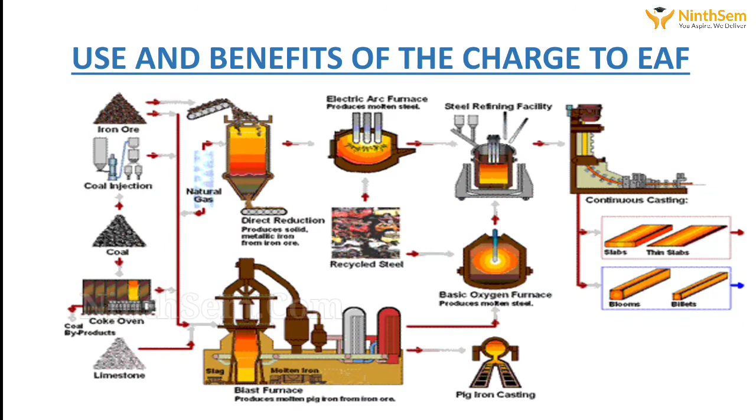In this session, I will share about the use and benefits of charge to the electric arc furnace. First, I will discuss about basic pig iron used in the electric arc furnace.

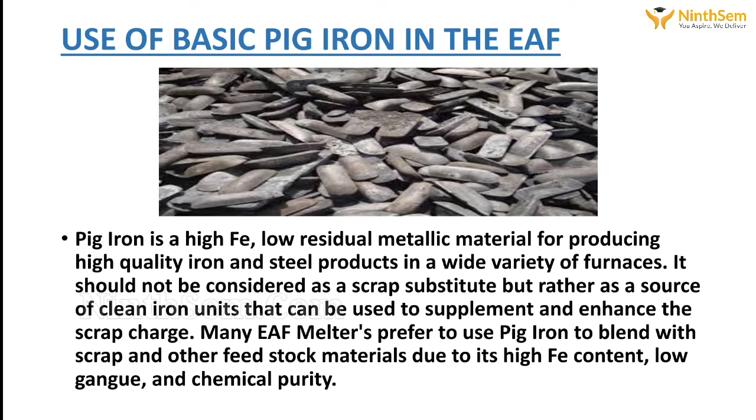Pig iron is a high Fe, low residual metallic material for producing high quality iron and steel products in a wide variety of furnaces. It should not be considered as a scrap substitute, but rather as a source of clean iron units that can be used to supplement and enhance the scrap charge. Many EAF melters prefer to use pig iron to blend with scrap and other feedstock materials due to its high iron content, low gangue, and chemical purity.

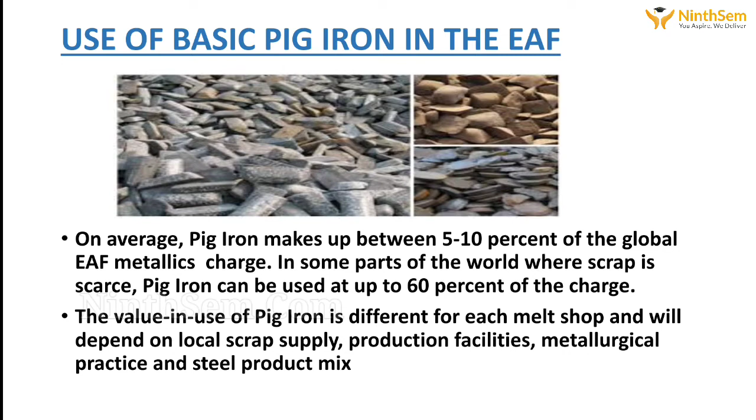On average, pig iron makes up between 5 to 10% of the global EAF metallic charge. In some parts of the world where scrap is scarce, pig iron can be used at up to 60% of the charge, depending upon grade chemistry. The value in use of pig iron is different for each melt shop and will depend on local scrap supply, production facilities, metallurgical practice, and steel product mix.

So what are the benefits of using basic pig iron in electric arc furnace? High purity, low gangue allows for the production of steel products requiring a low residual content or for the use of higher percentage of lower cost scrap in the charge mix. Its chemistry is known and consistent and certified by the analysis that is being done by the quality control department.

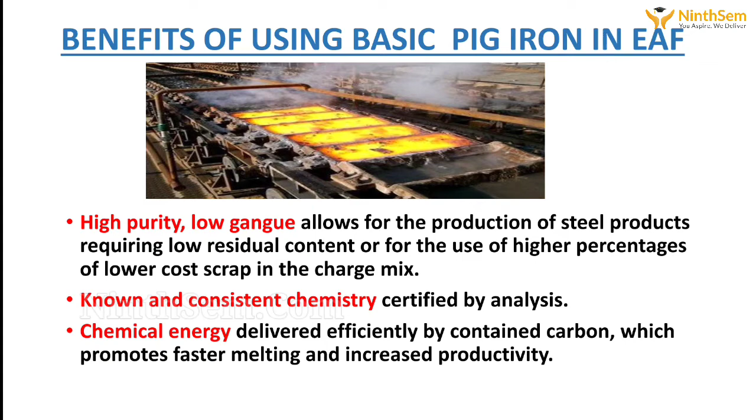Chemical energy is delivered efficiently by carbon content, which promotes faster melting and increased productivity. Its high density can reduce the number of bucket charges, allows for increased use of lower cost, less dense materials, and reduces storage space requirements.

It also has consistent shape and form, providing efficient material handling characteristics. And it is easy to store with no special requirements, silos, cover space, etc., with a very low rate of degradation even when stored outdoors and uncovered.

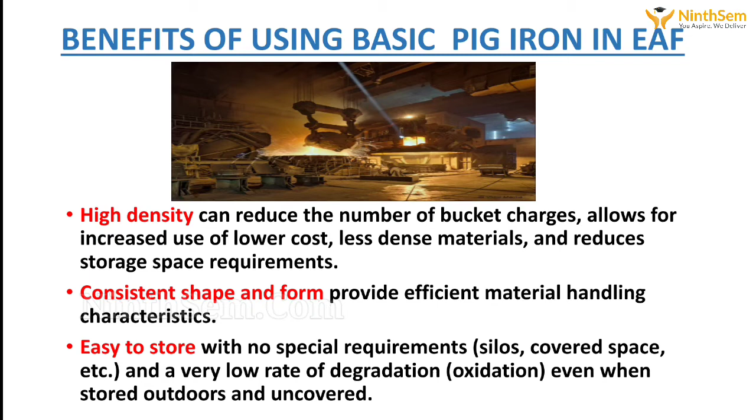Then, use of ferro shots in the electric arc furnace. Steel production in the electric arc furnace continues to grow worldwide. EAF melters prefer to use ferro shots to blend with scrap and other metallics due to its high iron and energy, carbon and silicon content, low gangue and chemical purity.

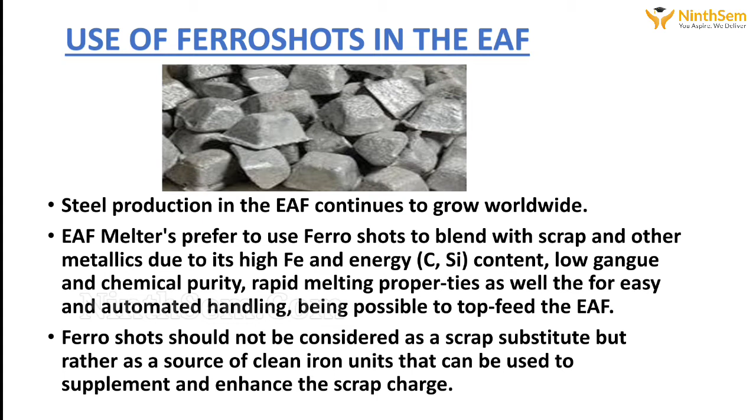It also has rapid melting properties, as well as easy and automated handling, being possible to top feed the electric arc furnace. Ferro shots should not be considered as a scrap substitute but rather as a source of clean iron units that can be used to supplement and enhance the scrap charge.

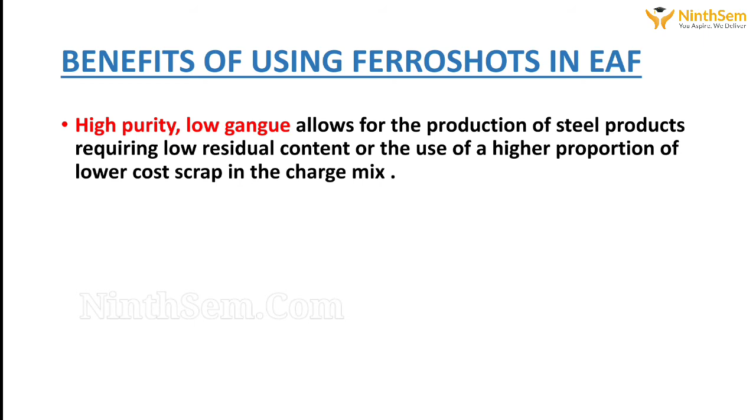Let's discuss the benefits of using ferro shots in EAF. It has high purity, low gangue, consistent chemistry, and chemical energy delivered rapidly by continuously feeding to the furnace, easy to handle manually and ideally in automatic operation.

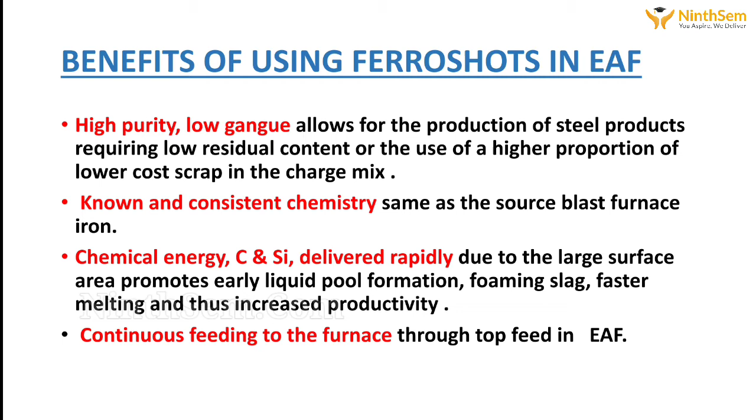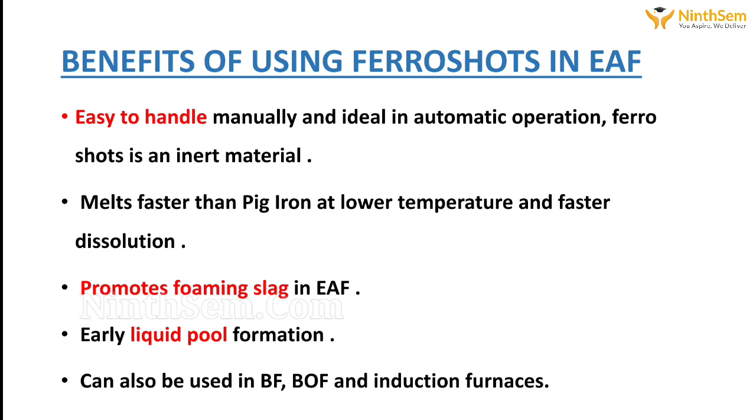It melts faster than pig iron at lower temperature with faster dissolution, promotes foaming slag in EAF, and early liquid pool formation. It can also be used in blast furnace, basic oxygen furnace and induction furnaces. Then, direct reduced iron.

The past 5 years have seen increasing supply and use of pig iron, direct reduced iron, and hot briquetted iron in the electric arc furnace. DRI should not be considered as a scrap substitute but rather as a source of clean iron units that can be used to supplement and enhance the scrap charge.

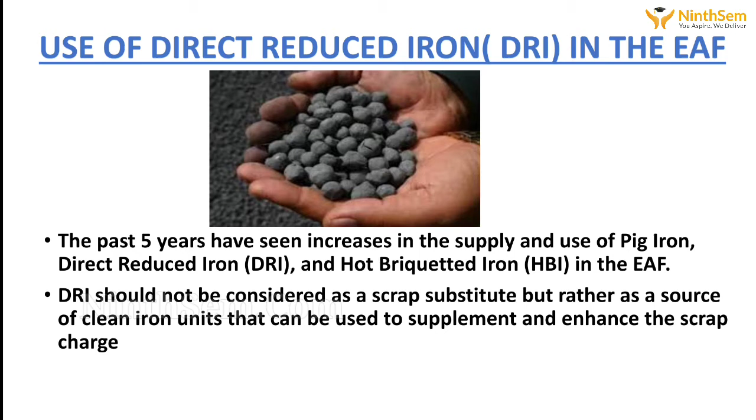DRI is a high Fe, low residual metallic material for producing high quality iron and steel products in a wide variety of furnaces. DRI is shipped as cold DRI, but in integrated DRI electric arc furnace mills it can be charged hot directly to the furnace. Furnace discharge temperature is 650 to 700 degrees centigrade.

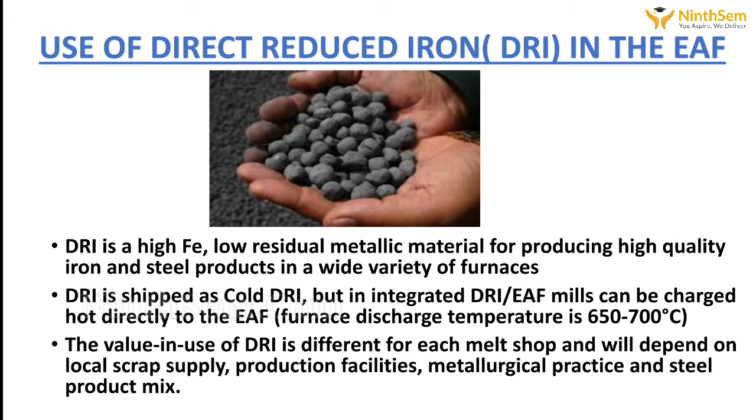The value in use of DRI is different for each melt shop and will depend on local scrap supply, production facilities, metallurgical practice, and steel product mix.

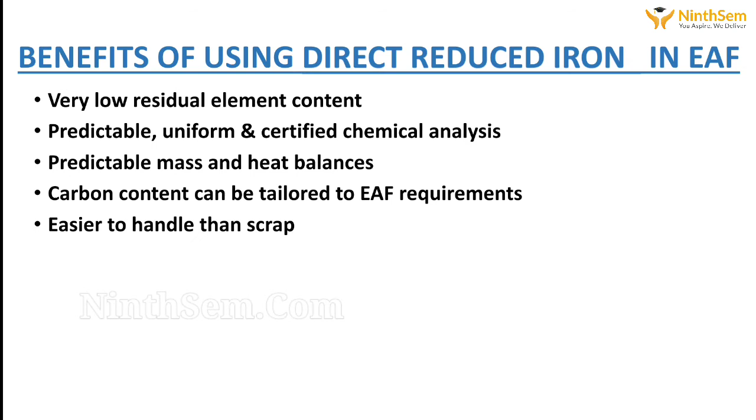Benefits of using DRI: very low residual element content, predictable uniform and certified chemical analysis, predictable mass and heat balances, carbon content can be tailored to electric arc furnace requirements, easier to handle than scrap, can be continuously fed to the furnace, can be hot charged in integrated plants, better slag foaming, control of nitrogen in steel, and melt consistency.

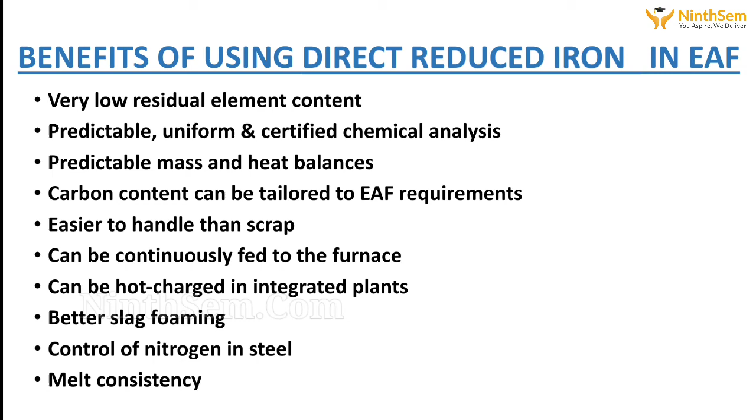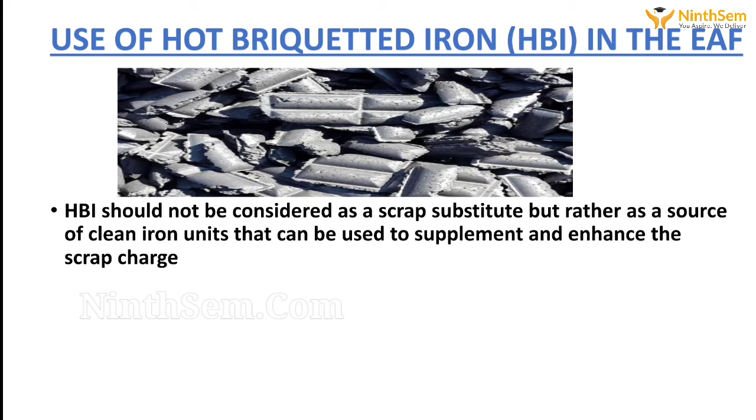Use of hot briquetted iron in the electric arc furnace. HBI should not be considered as a scrap substitute, but rather as a source of clean iron units that can be used to supplement and enhance the scrap charge.

HBI is a high Fe, low residual metallic material for producing high quality iron and steel products in a wide variety of furnaces. The value in use of HBI is different for each melt shop and will depend on local scrap supply, production facilities, metallurgical practice, and steel product mix.

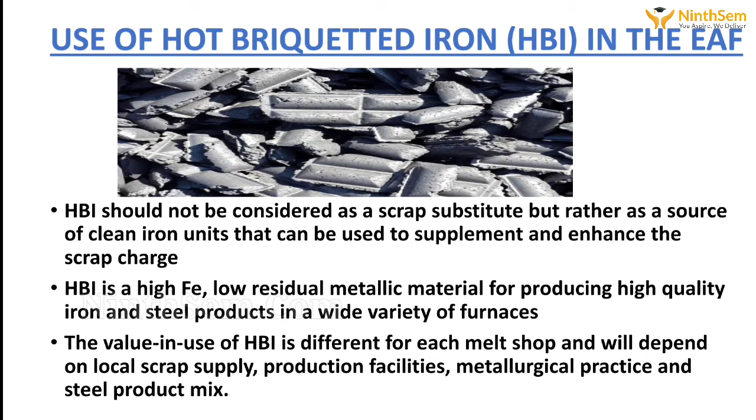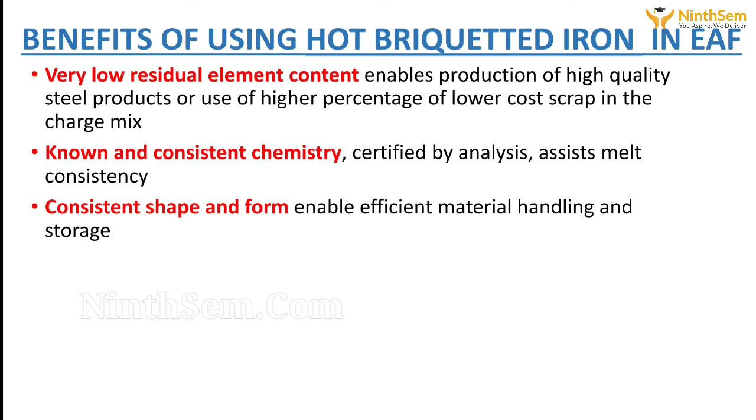What are the benefits of using hot briquetted iron in electric arc furnace? Low residual element content enables production of high quality steel products or use of higher percentage of lower cost scrap in the charge mix. The chemistry is known and consistent, certified by the quality control department through analysis, which assists melt consistency.

Consistent shape and form enable efficient material handling and storage. Its high density can reduce the number of bucket charges, allows for increased use of lower cost, less dense feedstock, and reduces storage space requirements.

It can be continuously charged to the furnace. It acts as a nitrogen scavenger, resulting in low nitrogen content in the steel.

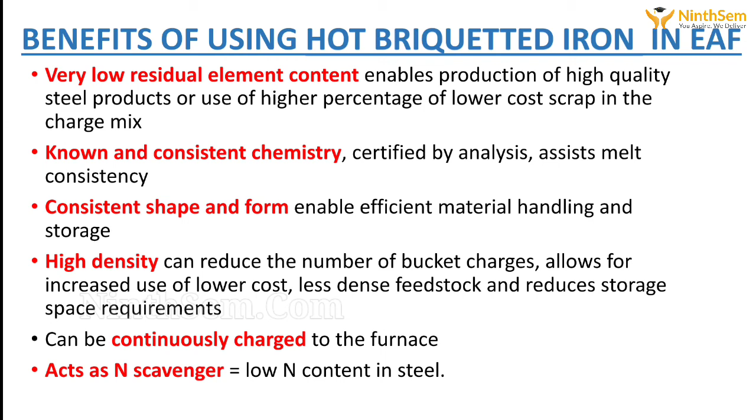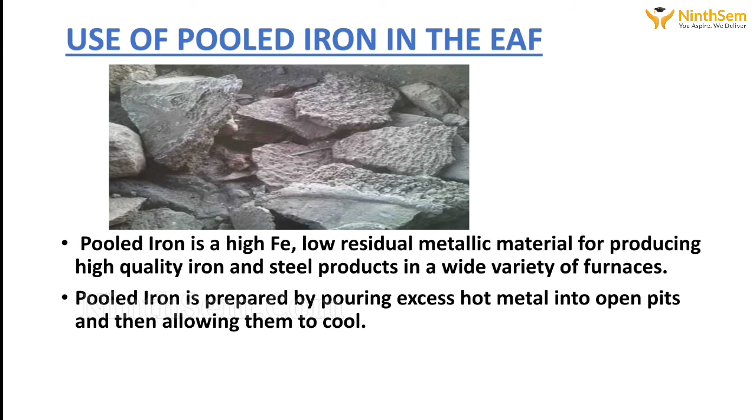Then, use of pooled iron in the electric arc furnace. Pooled iron is a high Fe, low residual metallic material for producing high quality iron and steel products in a wide variety of furnaces. Pooled iron is prepared by pouring excess hot metal into open pits and then allowing them to cool. This is later processed using drop ball and a rock breaker to break the bigger chunks of pooled iron into sizes suitable for furnaces.

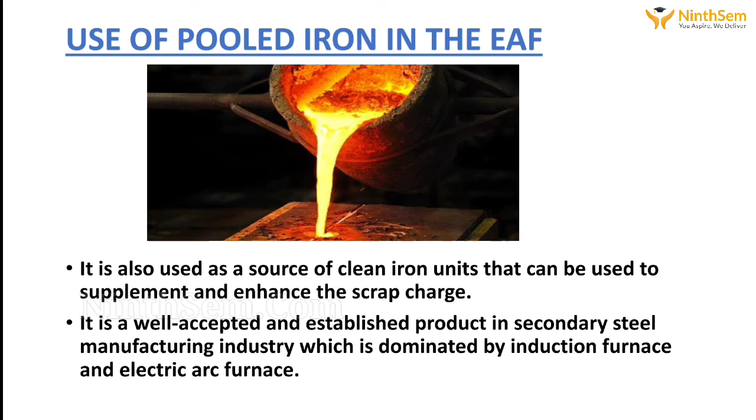It is also used as a source of clean iron units that can be used to supplement and enhance the scrap charge. It is a well accepted and established product in the secondary steel manufacturing industry, which is dominated by induction furnace and electric arc furnaces.

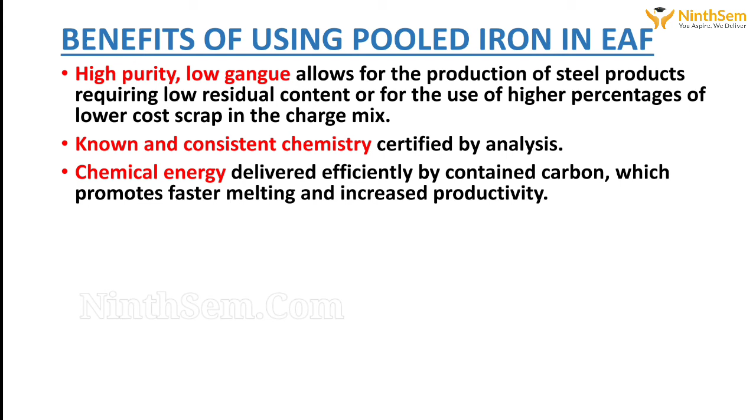What are the benefits of using pooled iron? High purity, low gangue, known and consistent chemistry, chemical energy delivered efficiently by contained carbon, which promotes faster melting and increased productivity. High density can reduce the number of bucket charges, allows for increased use of lower cost, less dense material, and reduces storage space requirement.

It has consistent shape and form, giving efficient material handling characteristics, sometimes in a chunk-type shape. It is easy to store with no special requirements and has a very low rate of degradation even when stored outdoor and uncovered.